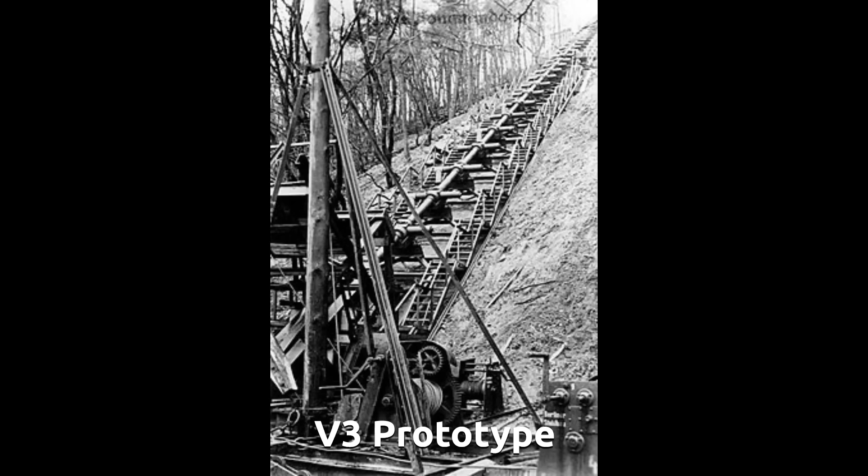The V1 was a pulse jet, the V2 was the one we think about, it's what we think about as being a normal rocket engine, the V3 was a great big cannon, and the V4 was a solid rocket jet, which was so inaccurate, I think only about 24 of them were ever fired at the end of the war.

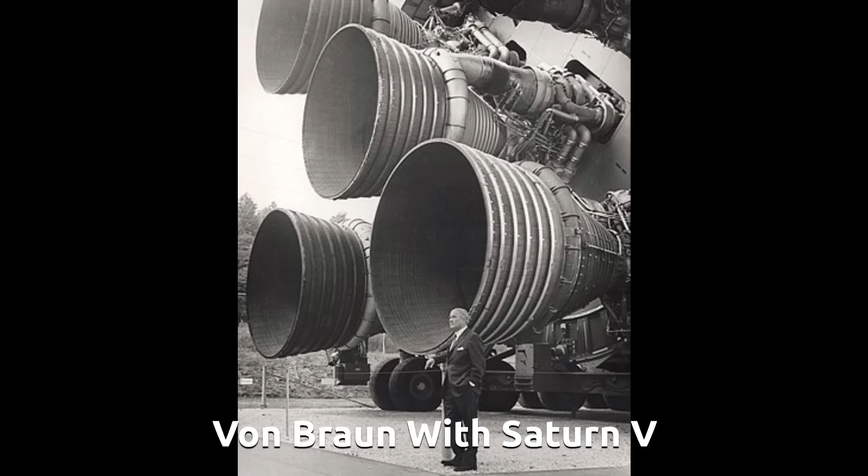But at the end of the war, Werner von Braun and about 1,600 of his other scientists were rounded up under Operation Paperclip and shipped off to the USA to work on the ballistic missile program. At the launch of NASA, Werner von Braun fell under their remit and is considered to be, I suspect, the father of modern rocketry. He's the one who's most responsible for the creation of the Saturn V rocket.

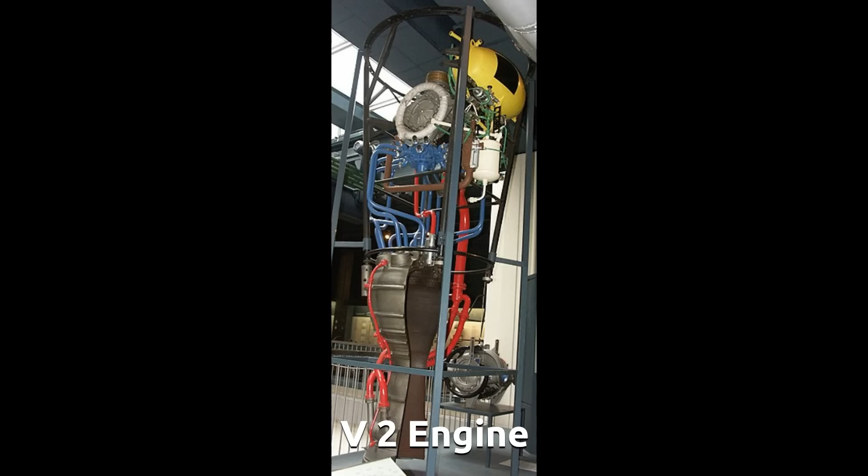The V2 was the first man-made object that made it into space. Now, it is an awesome and fascinating bit of engineering, particularly in terms of the design of the turbine and the pumps, because the V2 could deliver and burn something like 6,000 litres of fuel a minute. It took 5 minutes to fly from Holland to London. So, pretty impressive thing. It was supersonic. Nobody could hear it coming, and it created a huge psychological terror in the British population.

Now, the design of the turbine isn't something that's gone unnoticed. I think Integza did one where he actually tried to run a skateboard on it. And I thought I would have a go too. And Integza, though, has changed some of what he does. Instead of giving away the STL files, he has them on a site and you have to pay. So I thought I would give it a go, designing my own version of the V2 turbine so I could use it in a generator. And this is how I went about doing it.

So I got this. It's actually from NASA. It's their all-singing, all-dancing latest turbine blade, and that is a JPEG. Of course, for us to use it, what we need is an SVG, because we want to import it into a drawing program like Tinkercad. So what I did then was convert that into an SVG using an online converter and imported it into Tinkercad. So when I'd done that, this is what I got.

Now, initially, you might be a bit disappointed in that because, of course, what we want is this shape in between, and what we've got is this square, and all of this stuff we kind of have to get rid of to keep that shape. And the question, how do you do that? Well, Tinkercad's got a pretty good tool for that.

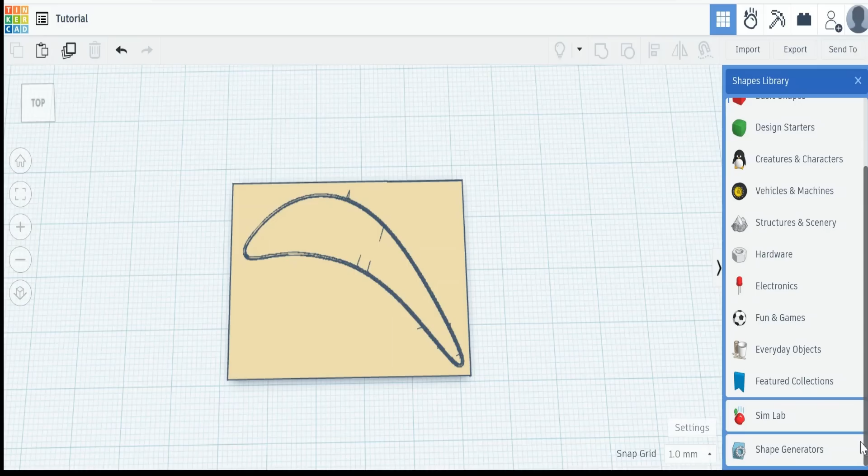If we go over to basic shapes and hit the down arrow, scroll down, or you look at the bottom, what you'll see is something called shape generators. You click on that. It will pull up these different tools, and we want this one, which is called extrusion. If you drag that onto the work plane, then you'll get a pull-down menu telling you what that is. If we position that over there, make that a hole, we can actually see through it to be able to see the shape that we want.

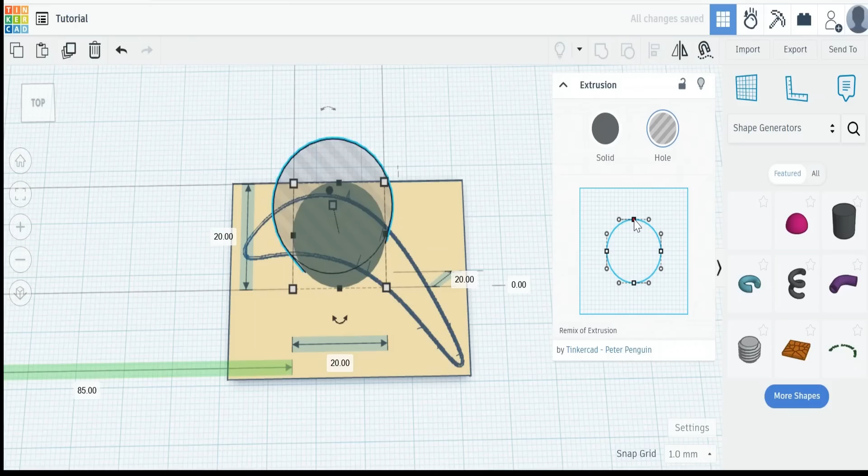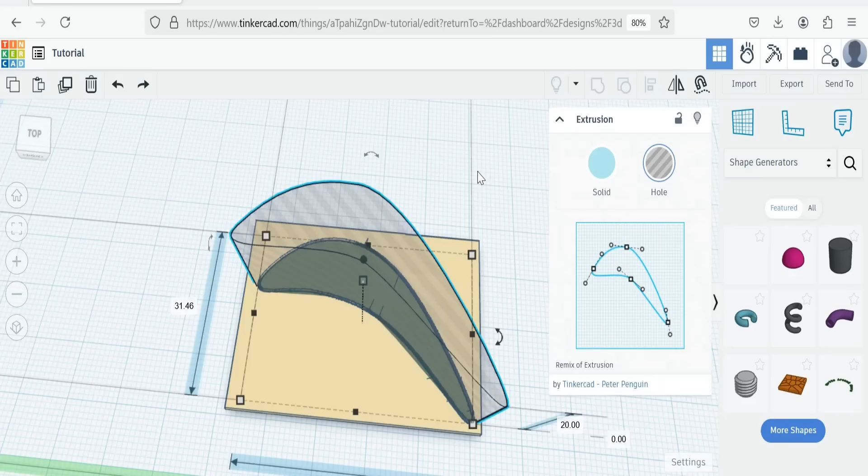Now, on this circle, we've got these points, and we can click on those points and drag them to fill the shape that we want, and you'll see it's flattening it there. On that square is a couple of circles. If we hold that circle, we can twist that round and move these points until we actually create the shape that we want. Now, as you move these points around, so the square points, and twist them using the round points, what you'll eventually get is that, where you've got a tracing of the shape that was in there.

So we can get rid of our guide, and we can change it from hole to solid, and what we have is our turbine blade. So to turn this blade into a turbine of the V2 type, what we need to do is take a disc and just attach a load of the blades around the disc, and that's where the name of this comes from. They've smashed together blade and disc to create the word Blisk. So this V2 type is known as a Blisk.

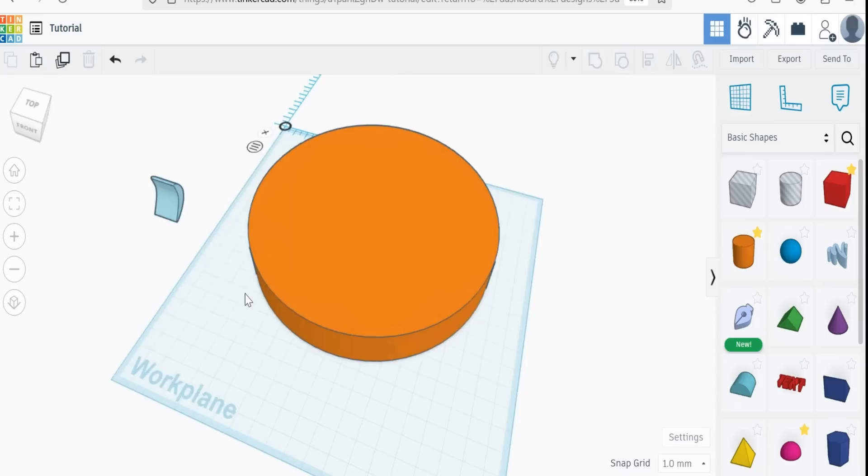Now, if you imagine that there's a line joining that point and that point, then those two edges need to be 22 degrees off this straight up and down, or at least what I read said that. But to add these, what we do is highlight the two of them, align it to the center, and align it to that edge. Now it's hidden completely in there.

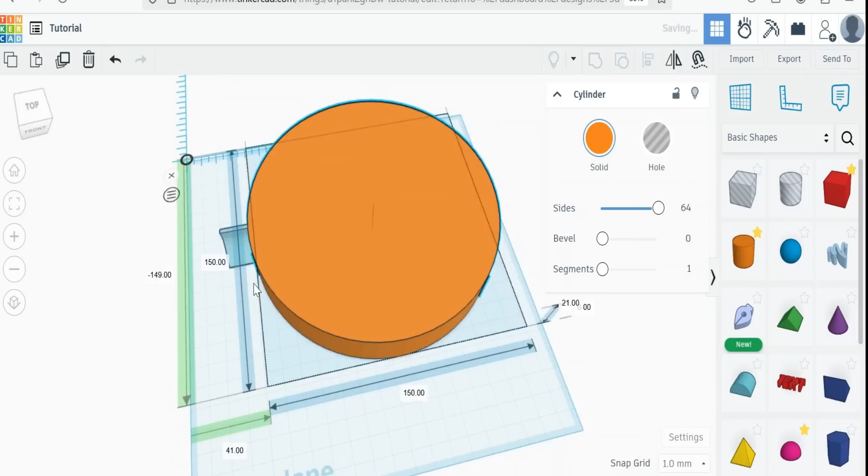We can unclick that and move the circle away by about 15 millimeters just by pressing the move 15 times, and what you'll get is your blade sticking out of the disc. If we keep on going, of course, it will separate. So if you move back, once we've got it sunk into the disc, then we can actually do a copy and repeat.

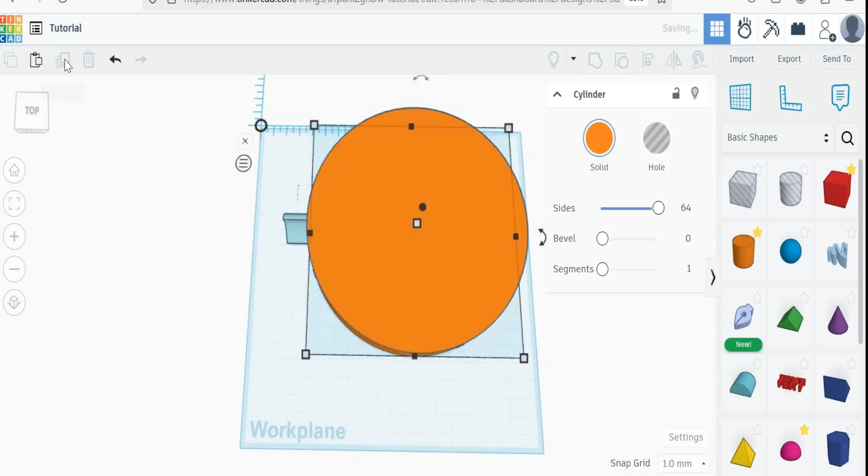Now this will go around the circle here, and we want it to carry that blade with it, so we create another circle, this time 200 by 200, just copy it, 200, 200, and it's 21 high, but we'll change it to say 2. And we'll see that our center disc and the blade are covered by this large outer disc.

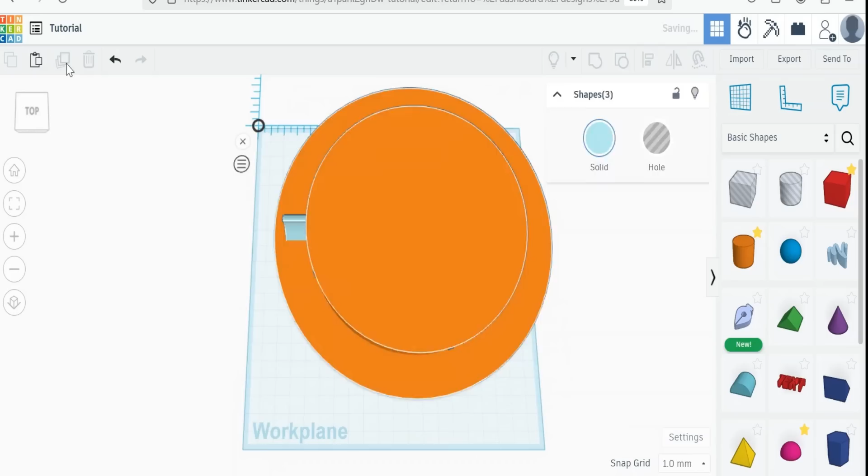Then what we do is highlight all three of them, then we copy it and move that by something like 10 degrees. That will give us 36 blades on this, which is pretty much what I want. So we move that by 10 degrees by going to the outer, follow it around 10 degrees, and we'll get 2. And we can continue that by pressing repeat, creating our bladed disc or our blisk.

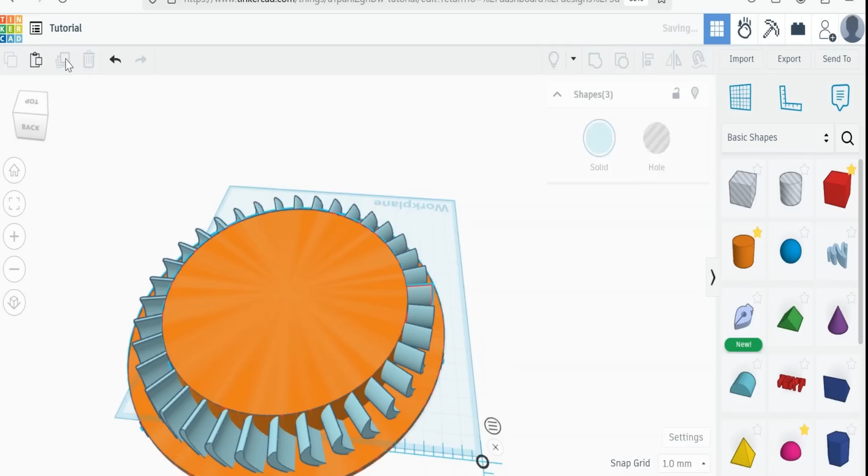There we go. Now we can get rid of the guide circle just by highlighting the whole thing and sticking it in the bin. Now we want to highlight the whole thing and press merge. Now I want an outer ring on this because I'm fascinated by generation at the edge instead of turning something in the center. So I want that ring to also carry a set of magnets. And the magnets I'm going to use are 15mm diameter, 3mm deep neodymium magnets.

So I've created a ring there at 200 by 200, or rather a cylinder, and I need to put some indentations in the side. So if I take a hole and make that the same size that I want the magnet to be, a little bit bigger so the magnet will fit, so 15.1 by 15.1, and remember they're 3mm deep, so we'll make that 4 so they sit down a little bit.

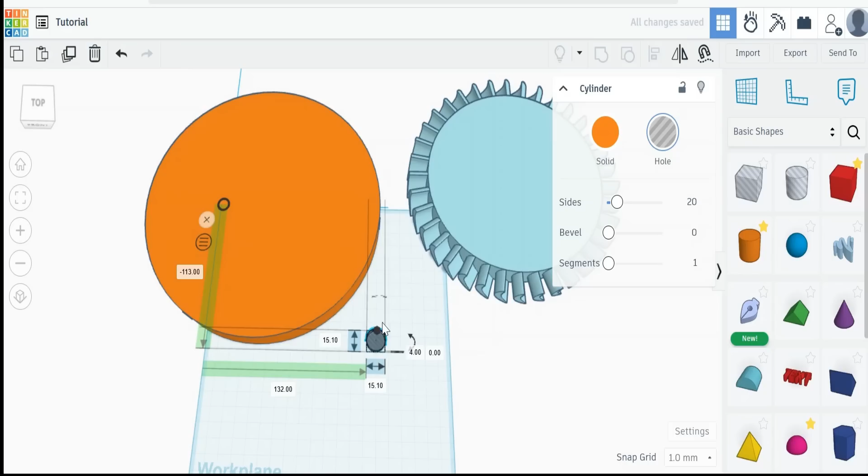We twist that around 90 degrees, and then we can align those so we get the alignment here and at this time on the edge there, and that will align our hole right there. Now it's at the bottom, so we also want to align to the center of that ring there. So click that ring and align it to the center. When I merge those or group them, then that will create a hole.

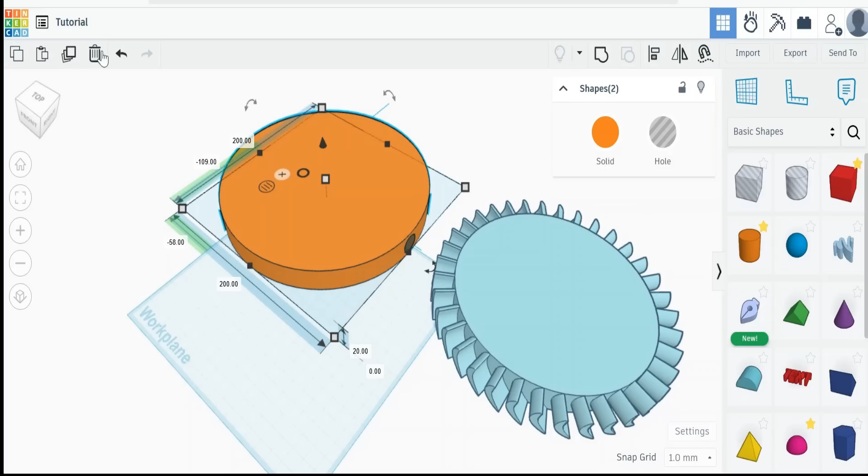But of course I want a whole bunch of them, so same routine. Highlight the two that you want. Repeat it, move it by the number of degrees that you want, and in this case it's going to be 10 degrees, and then just repeat that, and it will create the indentations all the way around for me where I can actually glue the magnets.

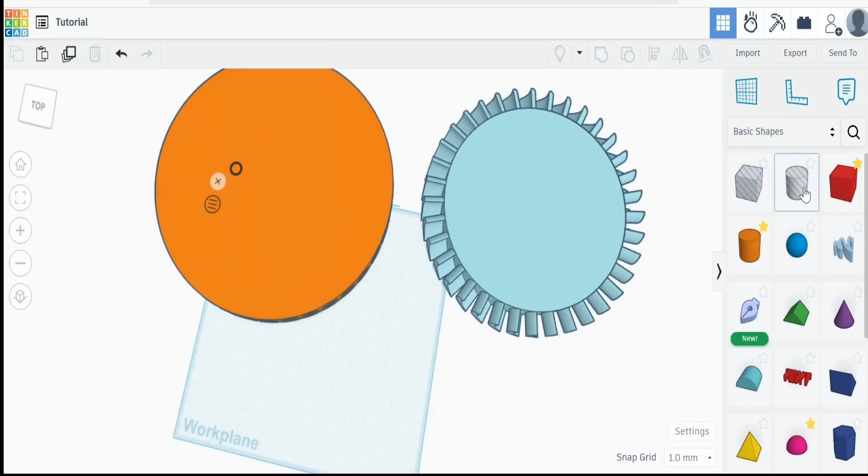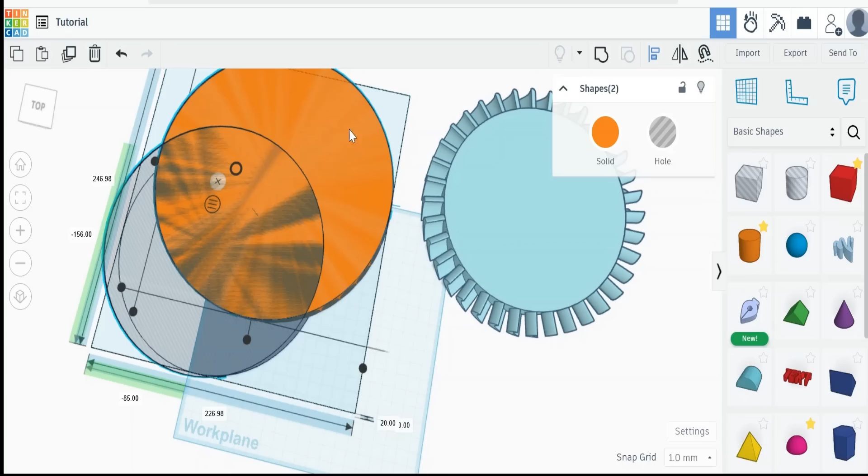There we go. Now of course I don't really want that to blank off that, I need another hole in there. So if we grab that hole, and this time we're going to make this 180 by 180. Smooth it out. And if we center it in there, and then we can group all of that together.

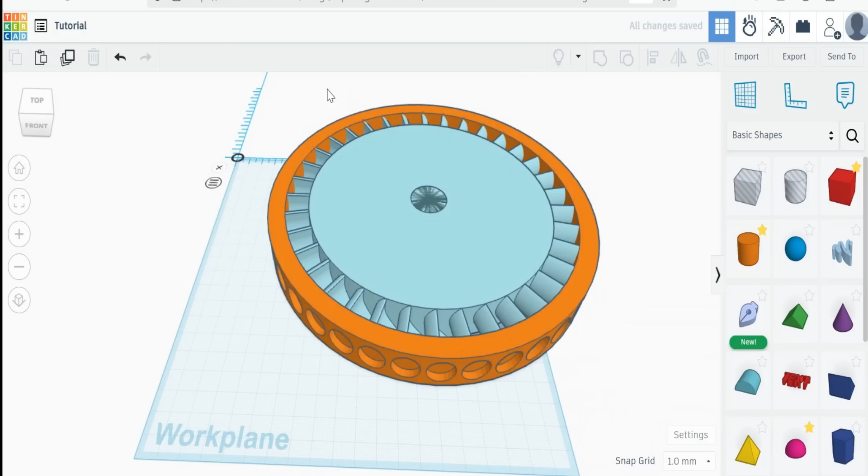We want a hole in the center of it, and I'm going to put skate bearings in, so I'm going to use a hole of 22mm, so we have to force those bearings in, but it will still lock them nice and tightly together, and then we can group all those three components. So we center them first, and then we can group them. And there is our blisk ready to print.

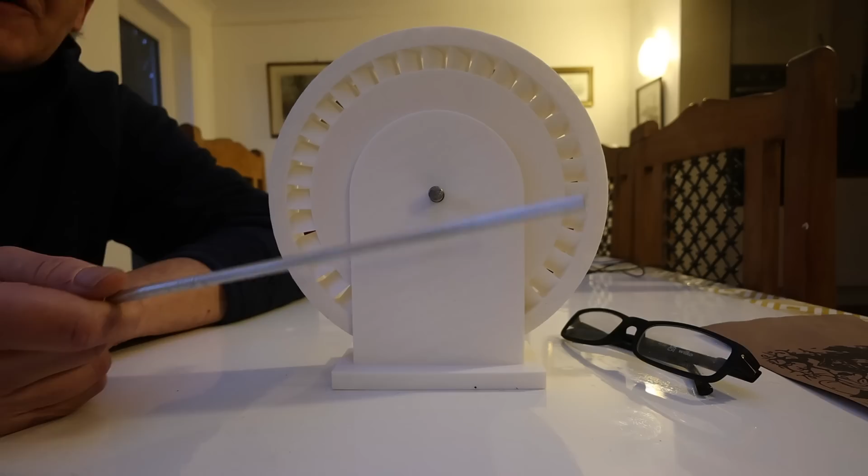That's it printed out, and I've stuck a couple of bearings in it, as you can see, and I've also printed a little cradle to hold it, and we have an axle. So let's put it together. Okay, I've got a metal tube here, and what I'm going to do is blow the air on it in one direction, in that direction, and we'll see how it does.

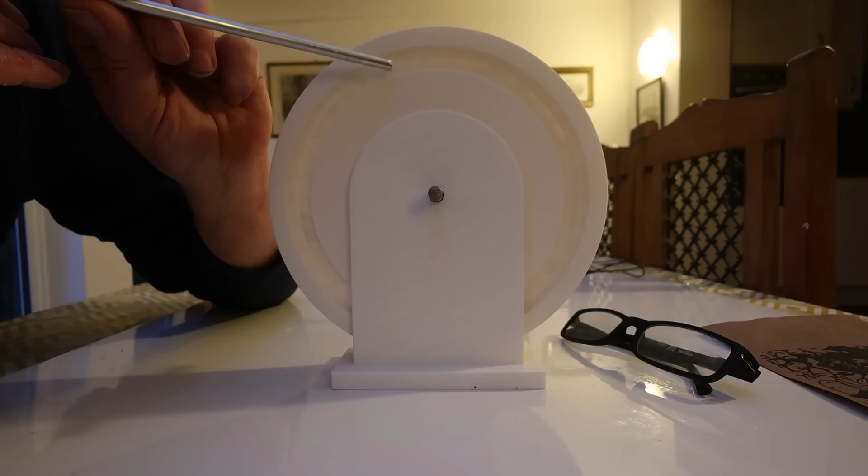That is some crazy speed, eh? They got there with a bit of blowing, as you heard, but it started to hum and it is spinning at some RPM. Now, of course, I've got to stick magnets in this and make a coil for it to make a generator, but the turbine itself, well, it's amazing.

Right, I would have said my effort at the blisk generator went quite well, actually. Now, we'll put these files on Thingiverse, of course, should anybody want to use them and should anybody want to beat me to actually making a generator, because I have to add the magnets, I have to make the coil, and then some kind of input. And obviously it's going to work best off pressurized air or possibly steam.